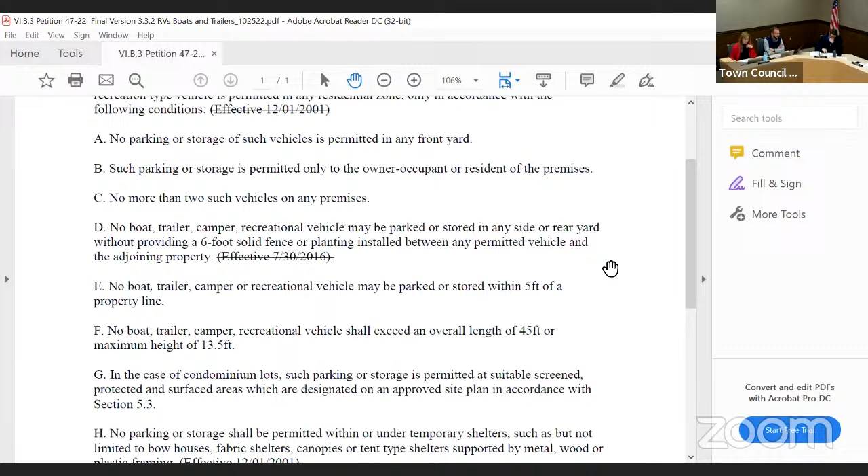So the new provisions that are proposed are that no boat, trailer, camper, or recreational vehicles may be parked or stored within 5 feet of the property line. We discussed this previously. This is consistent with how we regulate our detached accessory structures.

The logic here was that if it's permissible to allow structures such as a two-car detached garage type of structure to be located up to 5 feet to the property line, then this would be sort of an equivalent type of encroachment. That's how we regulated and decided on this 5-foot line, and that was discussed previously.

And then the other thing that was a recent discussion was the limits on height - whether we should regulate the mast, I think is the name of the stick. And we ended up concluding the appropriate height regulation should be at 13.5 feet. So those are the new things that have been shown here that you haven't seen in the last draft.

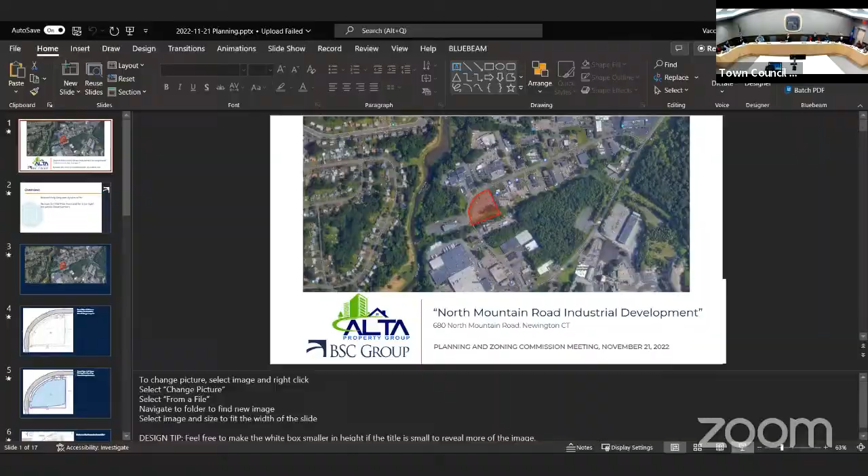Green on top. There we go, now we're green. Can you all hear me? Yes.

Good evening, ladies and gentlemen of the commission. My name is Francis Vaca. I'm a professional engineer at the BSC Group in Glastonbury, Connecticut. I am here on behalf of Ballymore LLC and Alta Property Group, located at 705 North Mountain Road in Newington.

We are here tonight in support of a project at the North Mountain Road Industrial Development, located at 680 North Mountain Road in Newington, Connecticut. We are here to respectfully request approval for section 5.3 site plan approval for a by-right industrial development at this location.

Just a quick explanation of location: it's located north of Hartford Avenue, right around the curve of North Mountain Road. There is a triangular parcel located there, and that is the current location of 680 North Mountain Road. The gray area on the screen is North Mountain Road, and the existing parcel size is 1.34 acres with an existing paved parking lot.

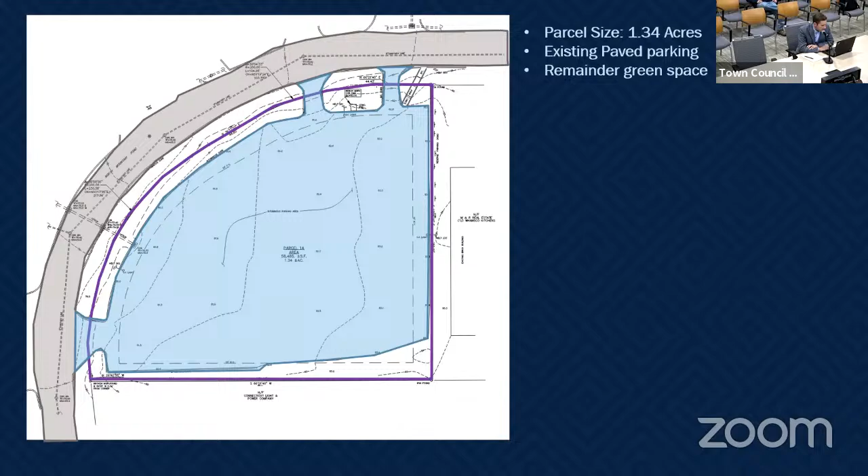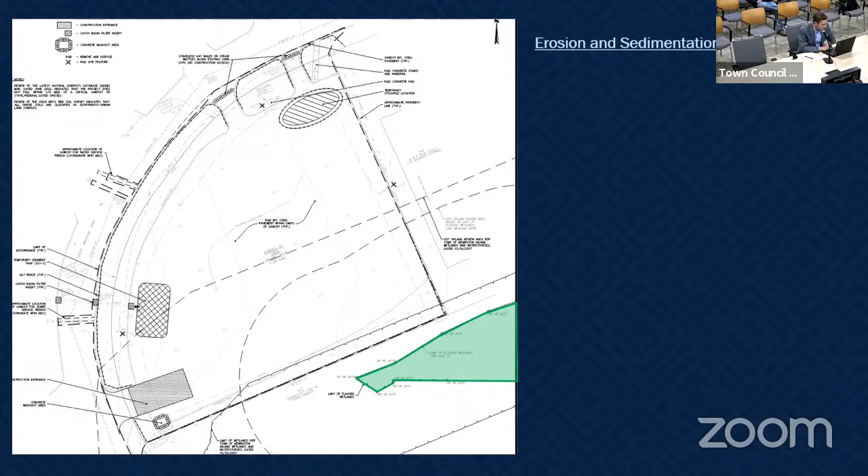I'd like to mention briefly that located to the south of the parcel there is a small section of wetlands. We met with wetlands on the 15th and received approval from them. There is no substantial issue with regard to wetlands.

As far as erosion and sedimentation control, there will be silt fence along the bottom of the site, and typical controls along the sides of the site. There will be standard sediment control traps during construction, collected here, with inlet protection on all of the drainage on the existing site and a standard town construction entrance.

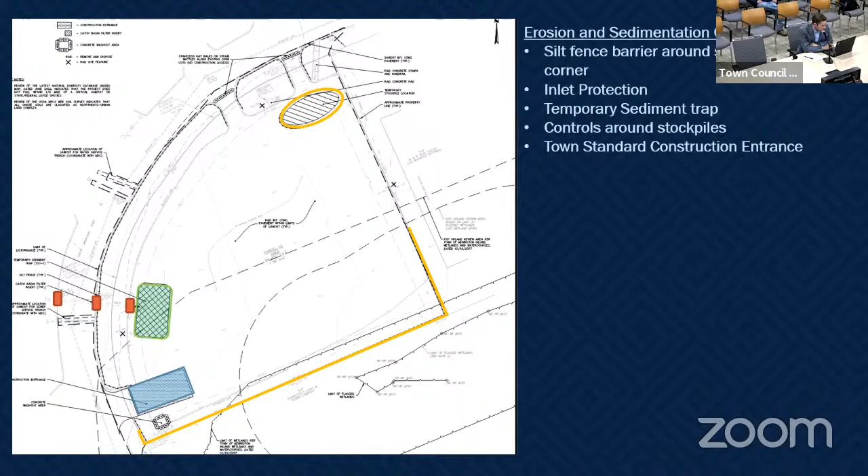As far as the proposed development, the area in orange shown here on the submitted plans is associated with the building. It is a 17,300 square foot flex use building. The intent behind flex use is that there will be a front to the building, which will be the public area, and the rear of the building will be for employee use only.

There will be overhead doors on the rear of the facility, and the flex use space is intended to be used along the lines of a landscape company, a daycare, or a brewery, which I know the town has always been looking for. There are no tenants at this point, but the intent is that the market for this type of building is pretty high at this point, and that is what is being proposed in this case.

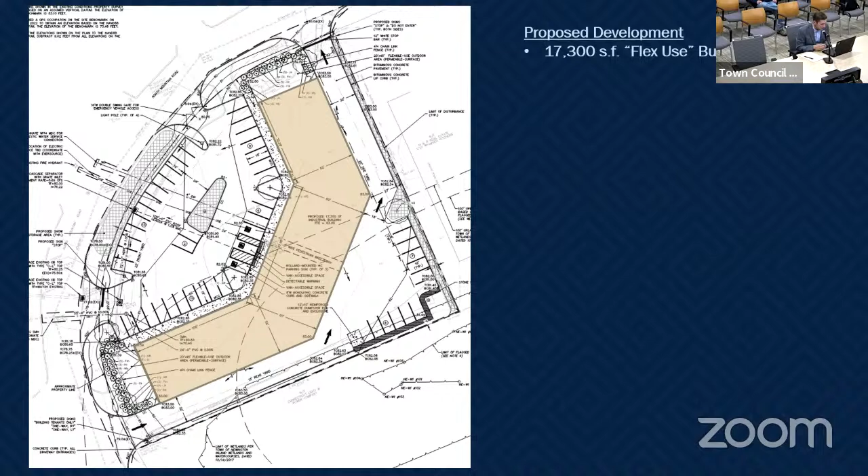There's going to be a front portion of the building, which is what we're considering the public portion of the parking lot. Then there's a rear portion of the building, which is the employee-only parking. There's 40 parking spaces in the front and 13 in the rear, for a total of 53 spaces, with 3 handicap spaces right at the front of the building in accordance with Connecticut Building Code.

One main point I'd like to highlight, which I know the commission would be interested in, is that originally the parking lot had 3 curb cuts. We are proposing 4, and as a result of coordination with planning and engineering, to mitigate that increase, we are including a fire department restricted access gate for the 3rd access into the site.

This gate will be closed at all times and is not intended for public use. The only time it will be used is in the event, God forbid, of a fire, or during snow plowing operations. The usual access for the public is that they will enter through the second entrance.

They will have full circulation in either direction around the front of the property to access any of the pedestrian front entrances, if the use requires public access, and then they will exit from the same entrance. The rear access around the building is one-way in order to maximize the space of the building on the site for industrial development.

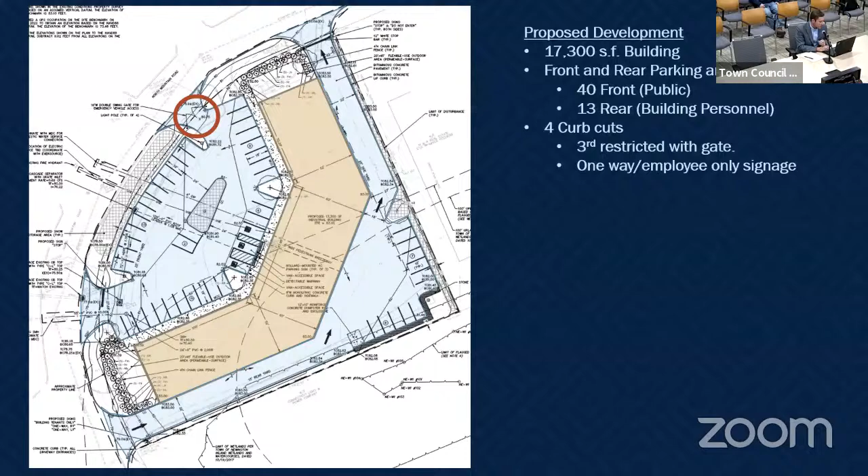By including this and breaking up the site the way we have, there is a reduction in the overall discharge that enters North Mountain Road, and it will be cleaned as a result of the water quality provided by this hydrodynamic separator.

On the rear of the facility, there's a small portion where sheet flow runoff will discharge to the south to maintain the flows into the wetland, just to ensure that we're not starving the wetland of any of the additional flows it received.

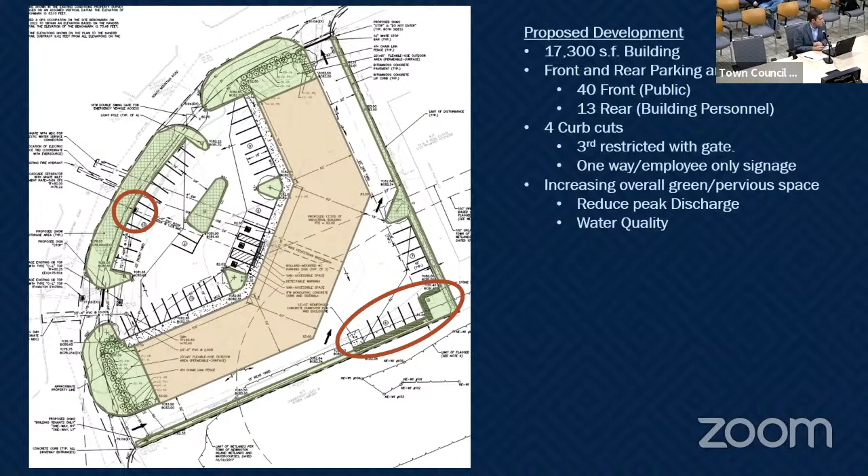I know one of the other items that is always a concern, especially nowadays with the increase in snow - we have allocated all of the areas identified in blue for snow storage. We specifically did not place any snow storage within this discharge point for the wetland area. So all circulation vehicles, the snow removal vehicles, will come in, following the one way and keeping all of the snow adjacent and away from the building.

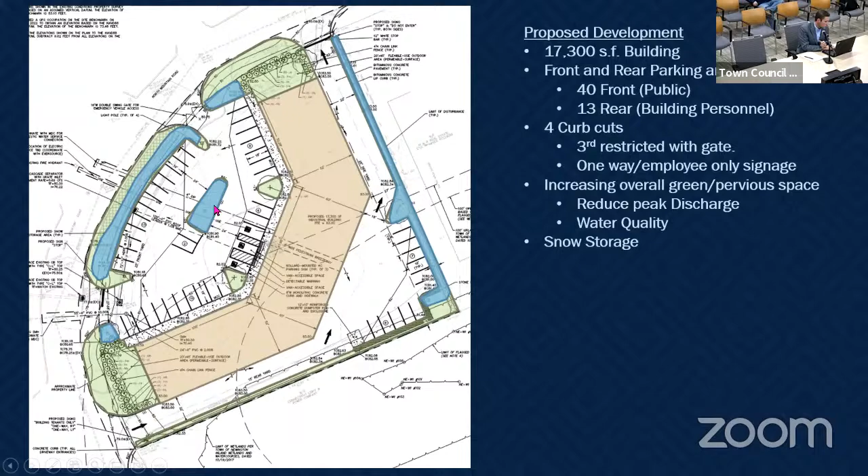Any additional material that is not accounted for along the side will ultimately have to be pushed over into any of the areas along the front.

And a brief summary before closing, just hitting the key criteria associated with the commission needs to usually look to existing and future character of the area. Currently the site is an open, unused parking lot. It's currently beginning to receive illegal refuse being dumped on the side, where it is our assumption that this building installation will effectively improve the character of the area and ultimately benefit this industrial development in this area.

Traffic circulation - I touched on briefly by closing off this access point, while maintaining fire department access. So fire department has access through the site. They would open this gate in order to exit, with fire department access circulating around the rear of the building. And again, because this will initially be just building employee use, we do not feel there will be an issue with traffic circulation associated with the site.

Adequacy of public utilities - being an industrial area, there is adequate power for this facility depending on the use. We already received an MDC willingness-to-serve letter for this area, and all remaining utilities would be adequate for what is being proposed.

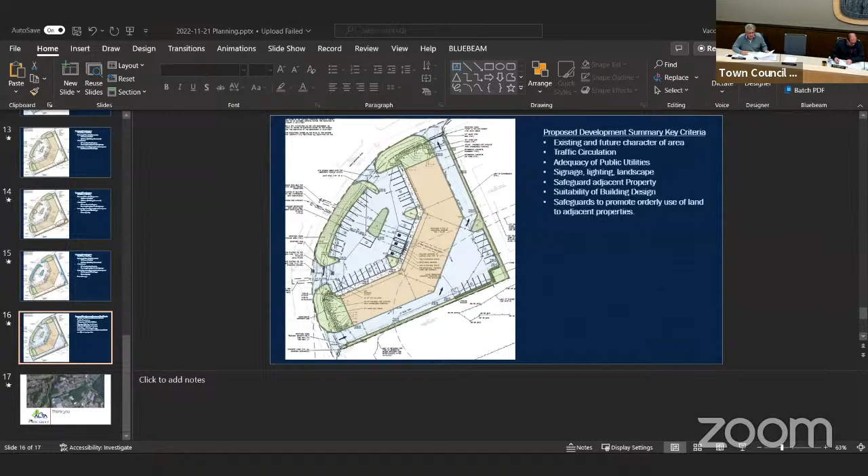The commissioner asks if there's even enough room, questioning how much space would remain for a vehicle or truck to get around if a few tenant trucks were parked there. The applicant admits there's not much room, pointing to sheet C3 which shows the fire access lanes, except near the rear corner parking area between the two buildings. They discuss that a parking spot is 18 feet, meaning only about 4 feet would be left for a truck to get around if someone parked there.

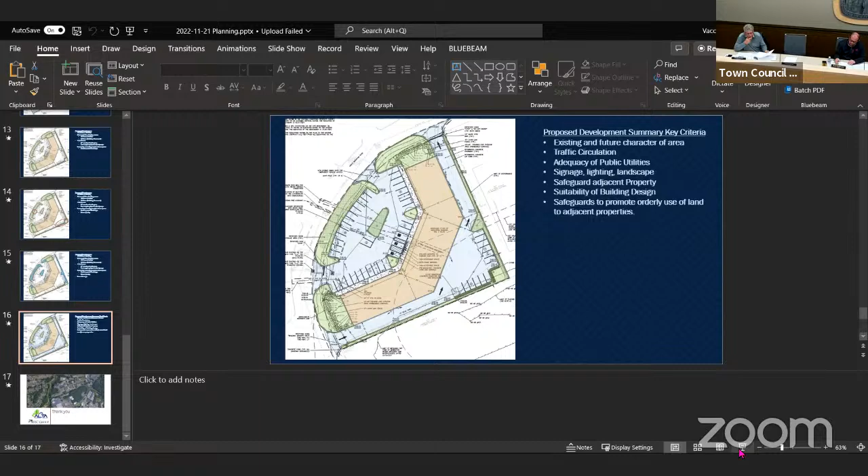Kevin Summers, the applicant, introduces himself along with Frank and clarifies that the garage doors at the rear are not meant for vehicles to pull into the building, but for trucks to pull up parallel to do unloading. A box truck about 12 feet wide would still have 10 to 12 feet to get around. They widened that rear area to function more like a driveway or receiving area, not for vehicles coming in and out, and they don't intend to have vehicles inside the building.

The applicant explains that a contractor space might have vans pulled up in the morning to load tools, or if a unit becomes a brewery or restaurant, they'd get food deliveries in back. The spaces run front to back with a small storefront, office, and bathroom in front, and they don't intend to cut the spaces in half, raising the question of what prevents tenants from bringing trucks inside.

The applicant admits they're unsure how they would handle or enforce that, other than keeping an eye on tenants. The commissioner then asks if there are any other questions and checks if staff have anything to add.

The main comment from staff on the design was the provision of 4 curb cuts, though the site currently has 3. Our contention was that 4 curb cuts was too many given the curve in this situation. We met with applicants on several occasions, and they provided a locked area accessible only for emergency access, which effectively brought the number of curb cuts down to 3.

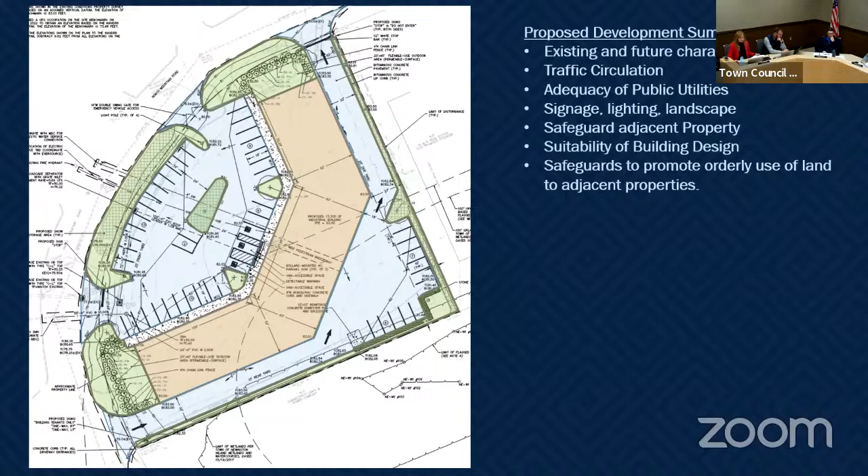Okay, so the two ends of the building will just be green space. Then why are you going to fence them in, though?

I think, if I may, Mr. Chairman, it's possible that if they had a daycare center, it would be an outdoor activity area, like a playground, which would be a permeable surface. That would be a special exception, exactly as Renata was saying. They might not be able to get a special exception because they're limiting the whole site here with only so much parking and everything, so as long as they understand that.

So you won't use the ends of the buildings for storage areas? No, storage, no. The main intent when we first decided this is that we actually own the building across the street and there's a daycare there. One thought is to move them over here, giving them a little outside space they don't have now, and a nice new building. But again, that would be under a separate permit when we get there.

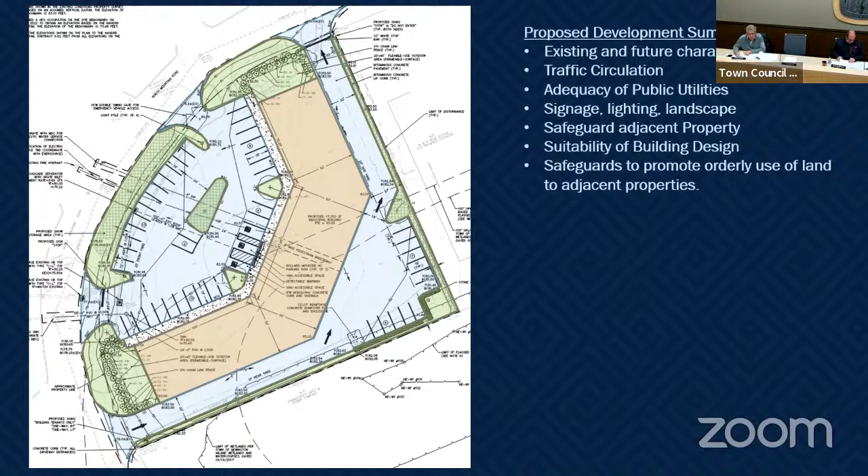Commissioner Woods: I was reading the plan during your presentation as to which of the entryways is going to get shut down, is it the north or south? It's here, I'll put it back. North? Right there, that's the one being closed off. So the front area essentially functions as...

Sorry about that. This front area essentially functions as if that entrance didn't exist. So entrance and exit happen via the second entrance, and then there's access in both directions around this loop.

And the other one is only emergency access. Exactly, and the reason behind the emergency access from that point is that fire apparatus can't make this swing. So from a security and emergency standpoint, our assumption is the fire apparatus would enter through this main entrance to reach the fire, and then once everything is done, has access to get out without having to back out. That's essentially the thought behind it.

Thank you, Mr. Chairman. Any other questions from the commissioners? I have a question, Mr. Chair. Certainly, go right ahead.

Is the intention to only have one tenant in this space, or is it possible to be subdivided? More than likely to be subdivided. Okay, how many are you thinking? The way our thoughts are now, it could possibly be around 12 spaces of approximately 1,500 square feet each, but one tenant may decide to take 4 of those. It all depends on what they're looking for when moving in.

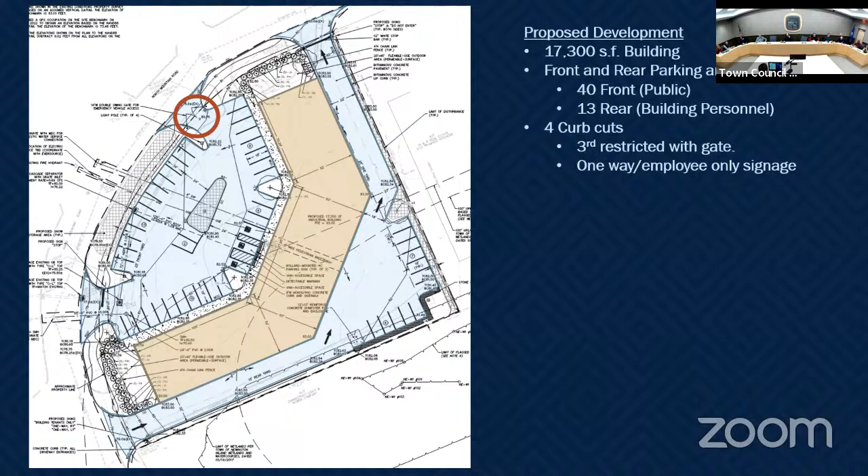Okay, the first petition under old business is petition 46-22. If Commissioner Gill could read that motion. Petition 46-22, special permit for freestanding sign at 203 Costello Road.

Motion to approve petition 46-22, special permit, section 6.2.5 for a freestanding sign at 203 Costello Road. Applicant Sign Pro Inc., owner 203 Costello Road, LLC. Conditions: the addition of internal or external illumination of the freestanding sign will require modification of this special permit.

Okay, motion made. Do I have a second? Seconded by Commissioner Woods. Any discussion on the motion? All those in favor? Aye. Anyone opposed? Motion carries unanimously.